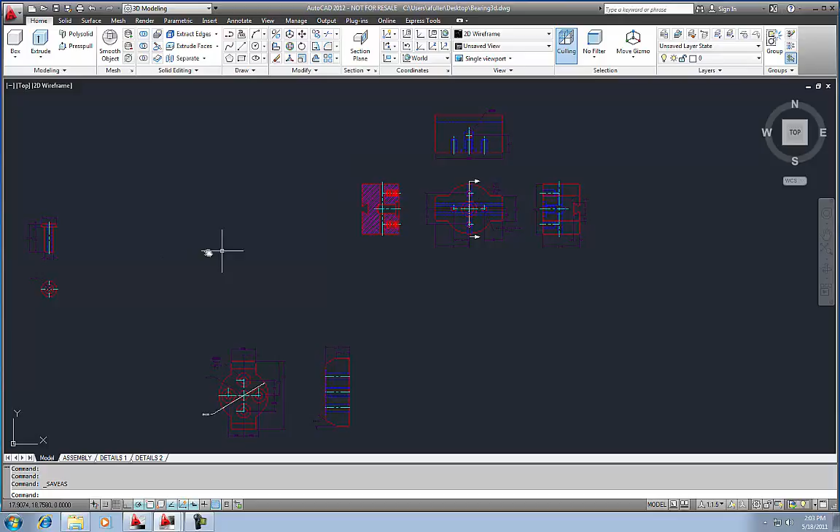So do save as. I'm just going to put mine on the desktop. Call it bearing 3D. You're going to save it into your Unit 7 folder, bearing 3D. Now I've got this guy open. This is just my regular old bearing drawing that I've already done. I'll just go ahead and zoom into the base right here.

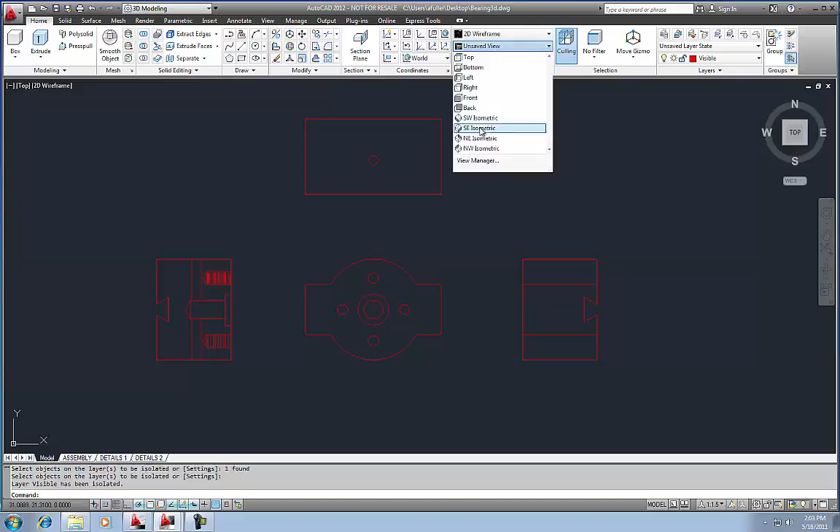I'm going to use my layer isolate, do settings and turn it off, and I'm going to isolate my visible layer. This is what I'm going to be using to make my 3D bearing. So what I'm going to do now is go ahead and go to my view. I'm going to do an isometric view. And I'm going to go ahead and put mine in conceptual. I just like it that way.

Alright, so I'm going to start off with this guy right here. I'm going to take that base and I need to extrude it to make it 3D. So I'm going to use my extrude command. But before I can use that extrude command, I have to make this a polyline. You can only extrude polylines. If I were to extrude right now, you see how it's only taking the lines and giving them depth? You can't really do that.

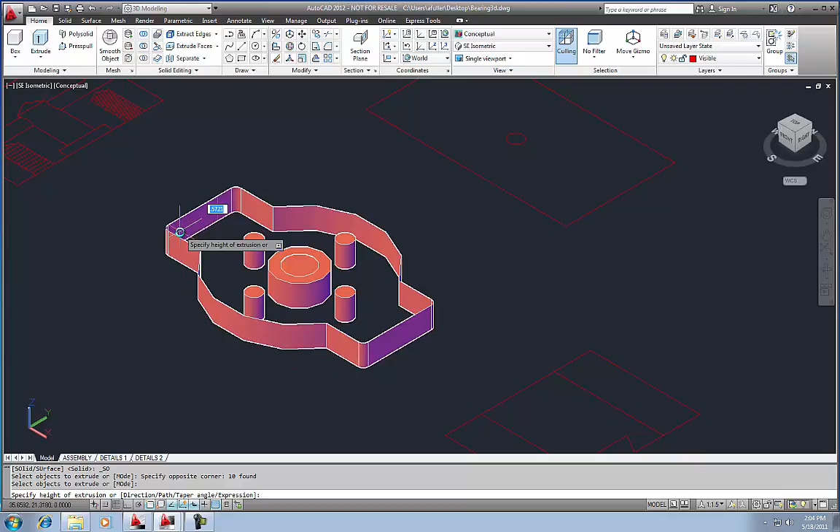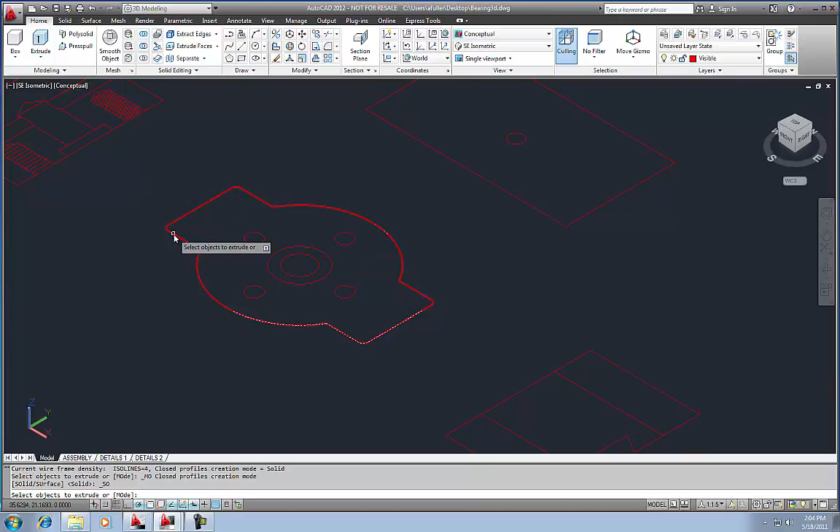So I'm going to do my p-edit, select the line, join, and what that did for me is it made this one long continuous polyline. Now when I extrude, select the polyline, it fills in that whole object and makes it 3D. So I'm going to pull it down a depth of 3.

These little guys right here, I'm not going to worry about those right now. I'm actually going to delete them, and you'll see why later. Those were the threaded holes that we had. What we're going to do later is insert a 3D bolt, subtract it out, and it'll leave behind those threaded holes. So I'll just delete those right now.

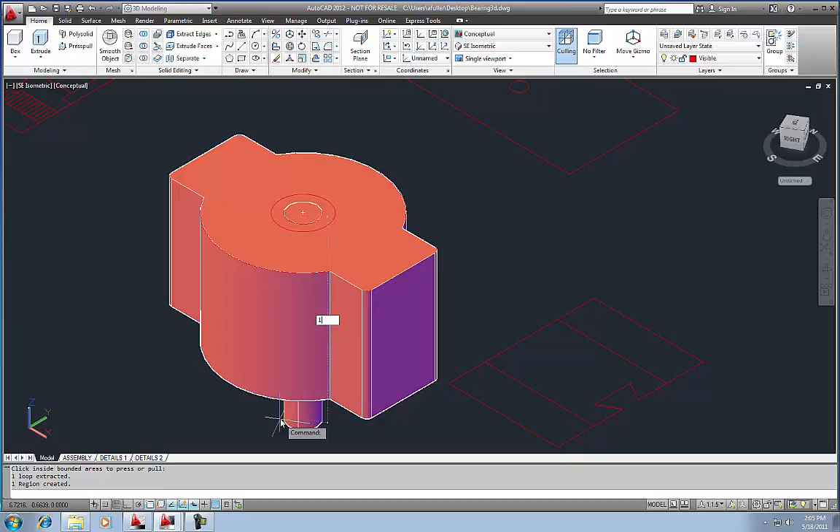Press pull is my favorite command, and this guy, you're going to press pull this down your total depth. Forget what the depth is on this one. I think it's 1.6. Let me pull it out here. Alright, 1.63. Alright, now I'm going to press pull this guy, and this one has a depth of 0.25. So I've got the hole going 1.63 down, I've got the counter bore down 0.25.

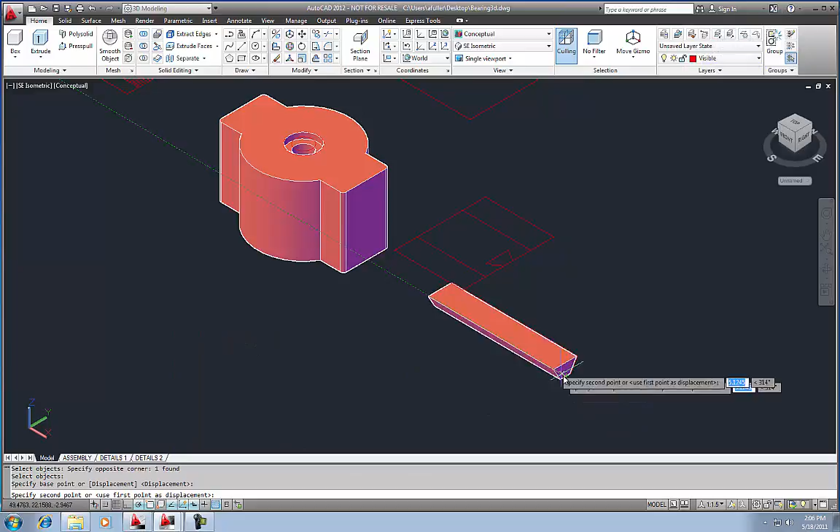I need to get this little dovetail here, and what I'm going to do is draw a line to close this off on the side. That way I can press pull, click here, the total height of this thing is 5.5. I'm going to use my rotate command. I'm going to rotate it along the y-axis, negative 90 degrees. And now I'm just going to move it, pick it up from, need to turn on my midpoint, pick it up from the midpoint and place it on the midpoint there.

Now what I can do is subtract from the base, enter that little shape, enter, and you'll see as I orbit, I just took that dovetail all the way through. I'm going to press pull this little circle. This thing had a diameter of 4, so I'll just make that 4. Now I'm going to come in here and rotate, but instead of just rotating that cylinder, I'm going to rotate all the lines with it too, and you'll see why in just a second.

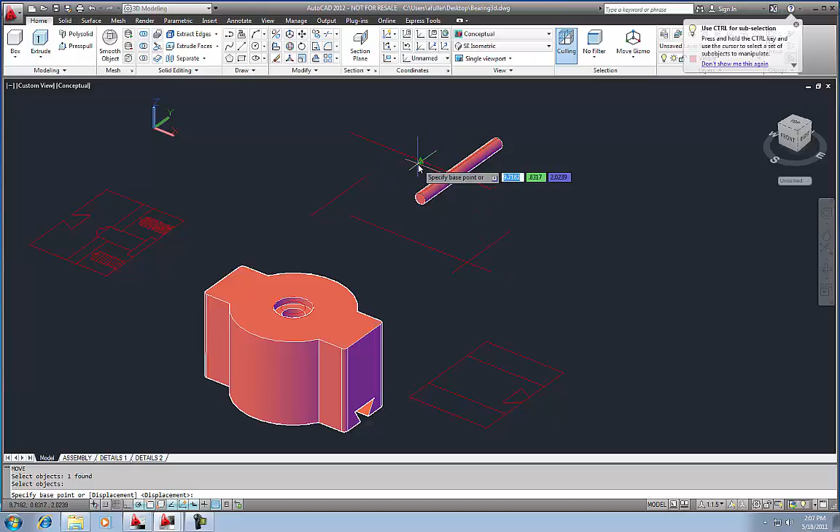When I rotate this 90 degrees, I'm going to move this, and the reason I rotated these lines is so I can select that top line from the midpoint, place it right here, and that just puts it in the perfect spot for me. So now I'm going to subtract from the base that cylinder, and that's it. I'm done with this one part.

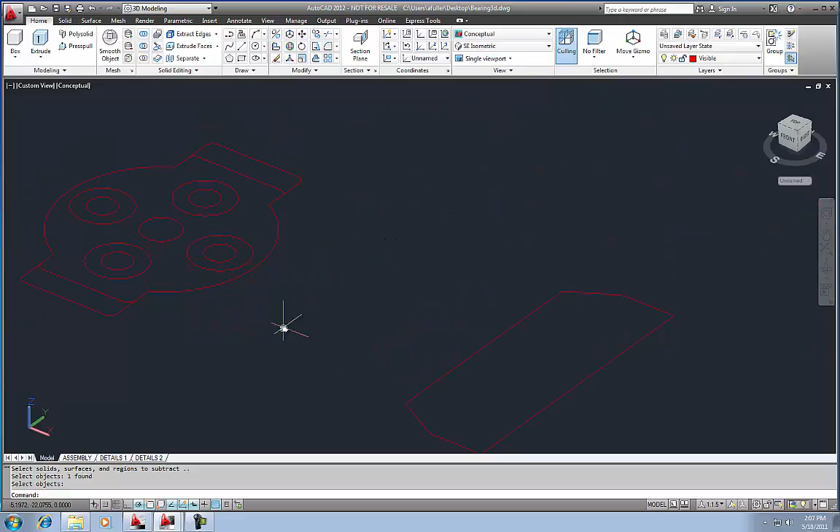I'm going to move over here. I do this part a little differently than the book does. What I'm going to do is press pull the side view. This has a depth of 2. And the book actually has you press pull all of this, or extrude all of this with these little flaps here. I don't do it that way. I actually start off with a cylinder, pull it down so I can see those holes, and that cylinder, I'm going to give it a depth of 2, and then I rotate this guy

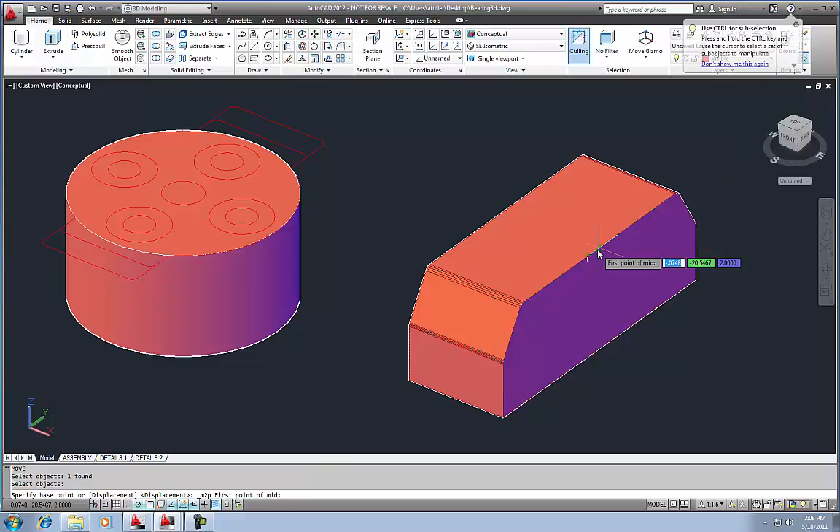-90, move, and I'm going to do mid between 2 points. So I'll pick it up from midpoint to midpoint, snap it to center, and then union. It is very important that you remember to union these two together. So I've got the overall shape.

Now I'm going to press pull. All of these smaller holes go all the way through, so you can just pull it through the object. This is great. In 2012, press pull stays active. This one goes all the way through. Now these guys only go down 0.1.

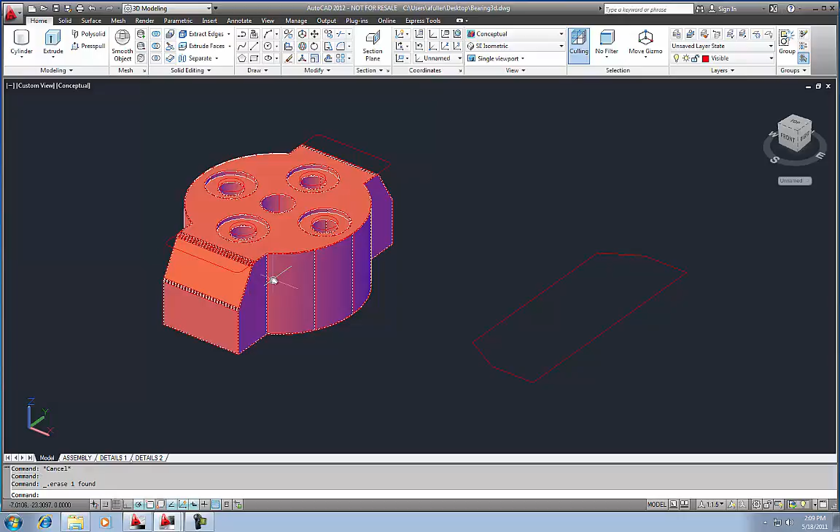Sometimes it does not work the way you think it should. There we go. For some reason it press pulled it, but it didn't subtract it out. So I've got this. It's totally done. I know there's fillets right here, but just through the years I've stopped worrying about those fillets on this project, and that's probably a horrible thing to say, but I say let's just ignore the fillets.

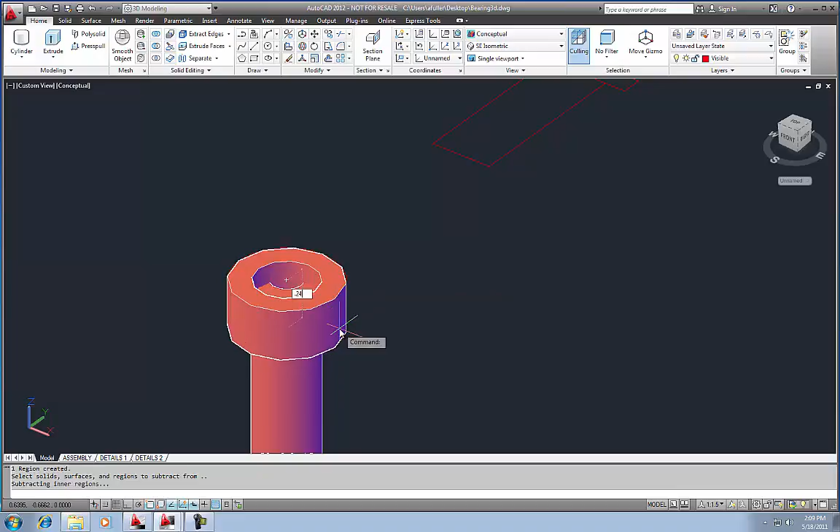Let's see. Now I'm going to press pull this guy. He has a total depth of 2.24. Press pull this 0.24 and union those two together so that it's one piece. Alright, so I'm done with all 3 of these parts.

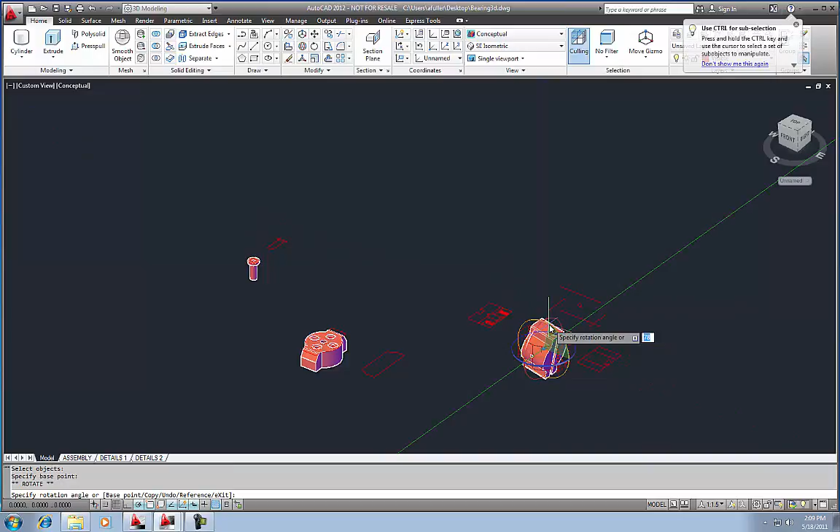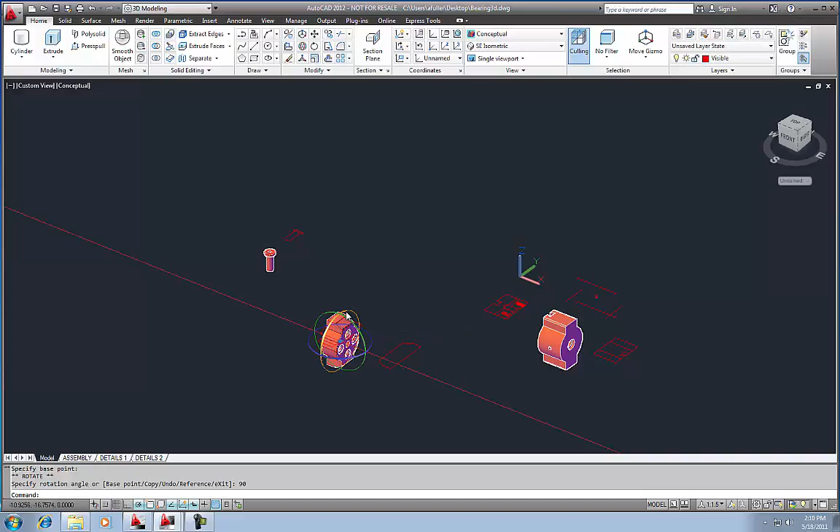What I need to do now is rotate them, kind of align them so that they're in line with each other. I'm going to do the rotate command, pick this guy up, and I'm going to actually rotate him this way. -90. Rotate this guy this way. Oops, not -60. Rotate this way. -90. I need to rotate him one more time. There we go. Rotate this guy 90. Not -90, but just 90.

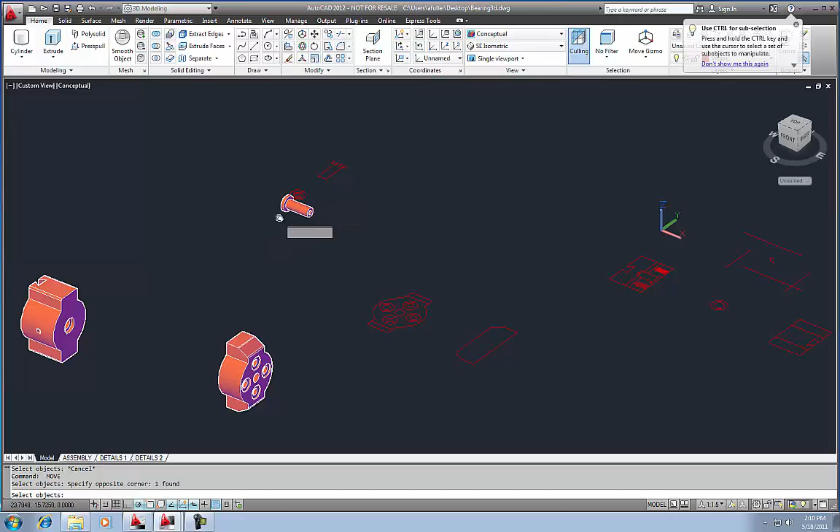Now what I can do is just move. I'm going to move all these parts kind of off to the side here. I'm actually going to move this guy right where he belongs. Move this one right there. So these parts are all done. I didn't have them in the right place.

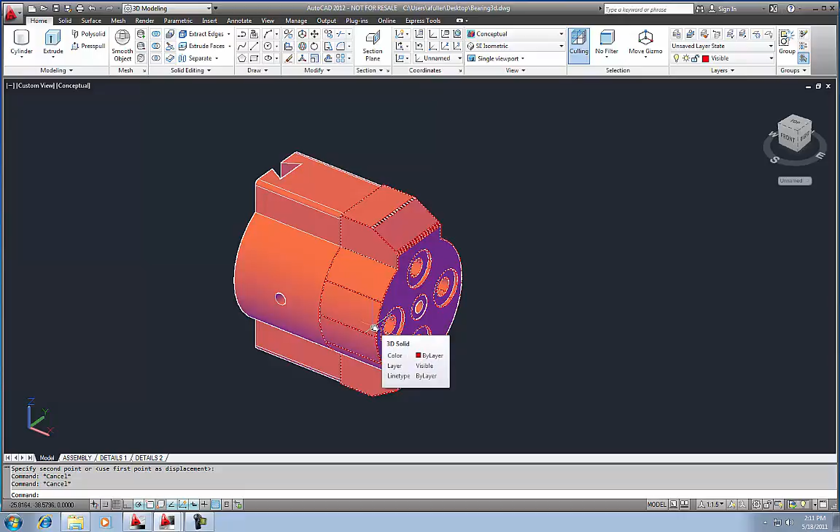Okay, so now what I need to do is a couple of things. I need to make that washer, and I need to make the 3D bolt and subtract it out and then get this thing in order. So what I'm going to do here is just look in the book. I'm looking at the chuck print at the end of the bearing project, and it says type B washer. It says diameter 0.513. I'm just going to do a regular little circle over here. D for diameter, 0.513. Make another circle. D for diameter. This time it says the diameter is 1.

I'm going to press pull this, and it tells me in this note that it has a depth of 0.063. That's it. I'm done with that washer. Go ahead and rotate him up. And all these red lines, you can delete those when you're done, which is why you don't want to do this to your original drawing.

Alright, so now there's a command. It talks about it in the book. It's called ACISIN. I have no idea what that stands for, but we have a 3D bolt that was brought in from McMaster-Carr's website, and it was already done for us, but it's an SAT file, and I don't know what program makes SAT files. This ACISIN command actually grabs that SAT file and brings it into AutoCAD as a block. So ICISIN. No, ACISIN.

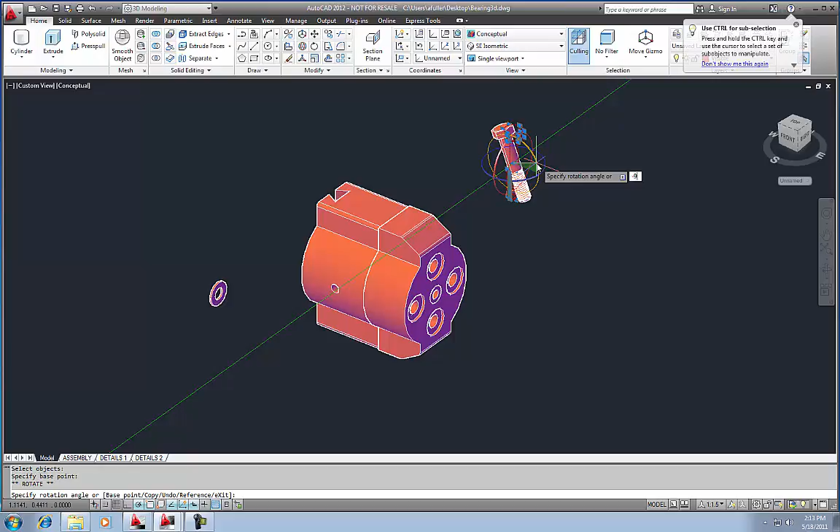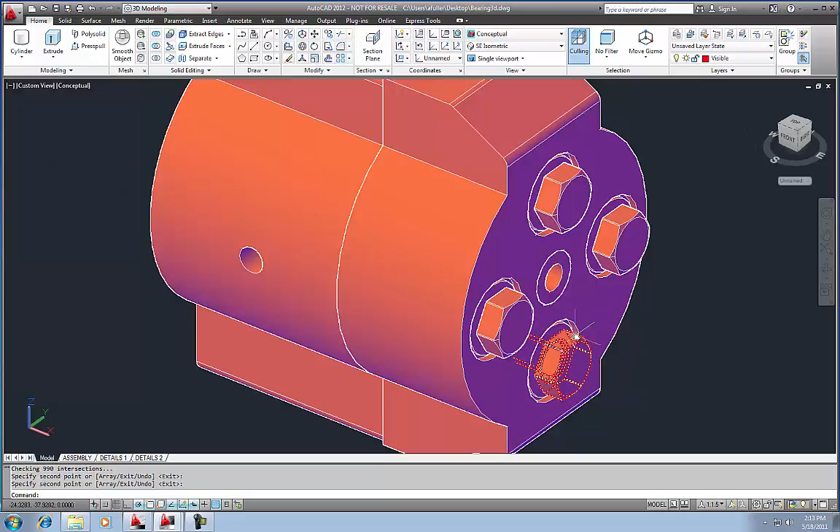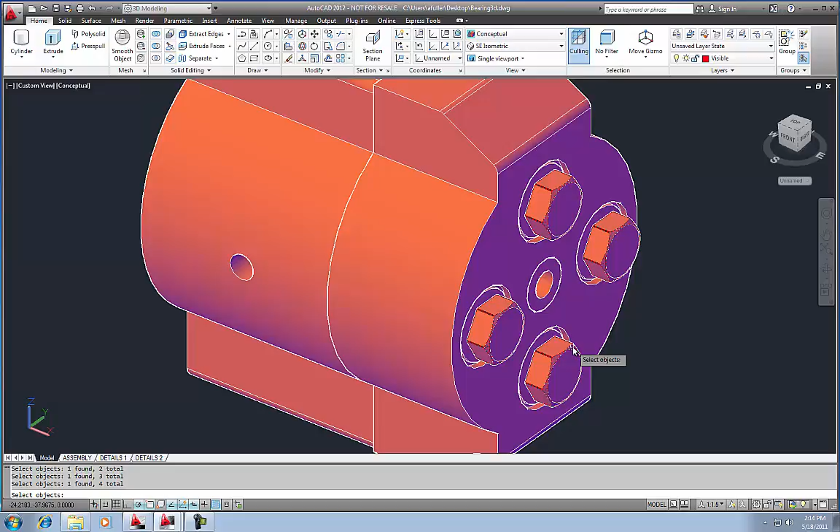Alright, now what I'm going to do is copy this into place. I'm going to copy this here. I'm actually going to copy one more time. The reason for this is I'm about to subtract these bolts out, and when I subtract them I'm going to have to put them back in the same place. So I may as well just make a copy right where it is. That way the version that I subtract out, when it goes away I still have bolts left. My second copy. So select objects, press enter, specify base point. If you just press enter right here, it just makes a copy right there.

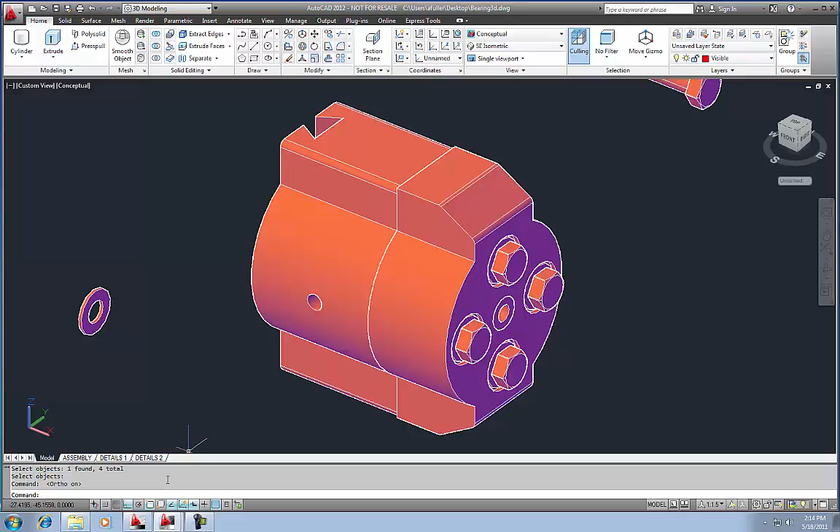So what I'm going to do now is subtract from the base. Do not select the base and the cap. If you do that, it'll subtract it from both of them, but it'll also union those two together. You don't want that to happen. So subtract from the base only, enter, this, this, this, and this, press enter. Doesn't look like anything happened, but that's because I had a second copy here. But check this out. I'm going to turn on my ortho, and as I move this away, there I've got my threaded holes.

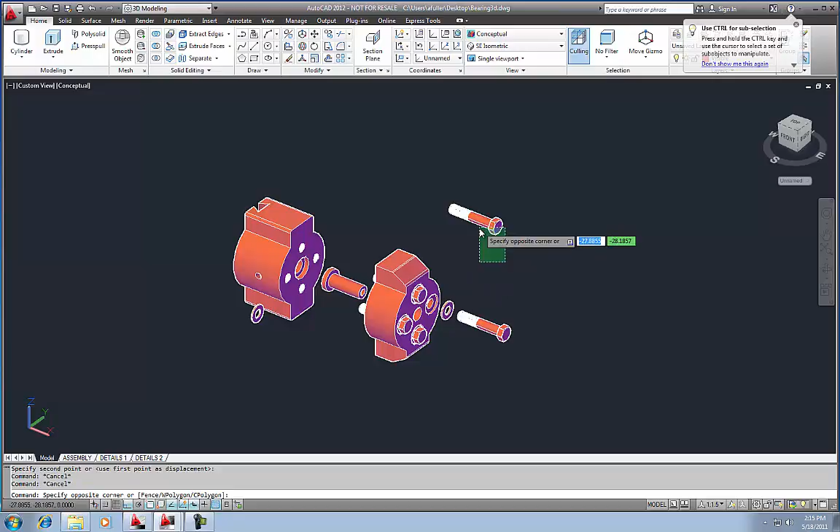Go ahead and move this out. Move out one of these. Make sure your ortho's on when you're doing this, or that you're using the 3D move. And that's it. I don't need this. I don't need that. Zoom in, you can see those threaded holes right there. And that's it. We're done with the bearing.